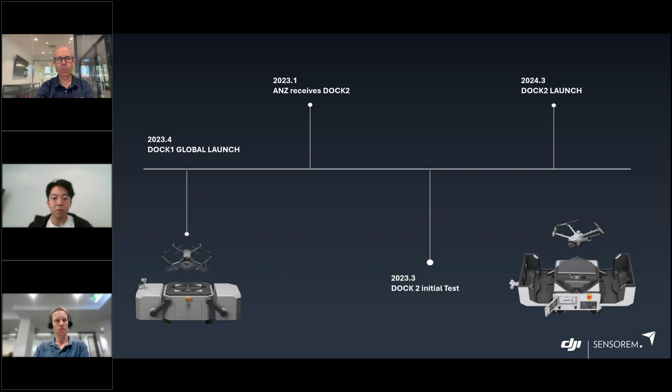Speaking of case scenarios, it achieves great success in security, patrol, search and rescue, first responder, and obviously asset inspection with the zoom camera. I have to admit there's a bit more limitation on the geospatial side. We understand that some end users are really looking forward to something that can also map rather than just focus on inspection, and also accurate flight inspections. That's why we released Dock 2 this year.

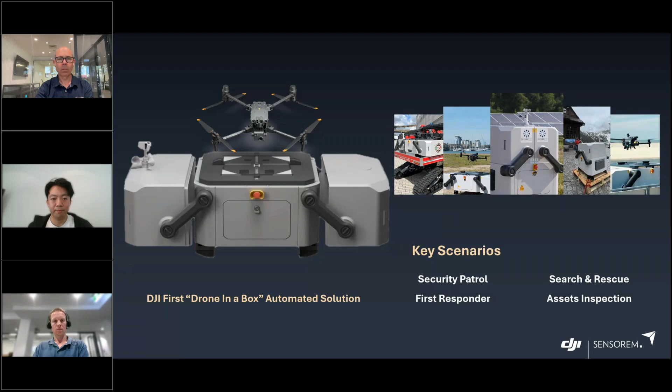So what's the difference between the dock units themselves? As you can see, the dimension is a really attractive improvement—it's just about half the footprint of the Dock 1. The weight is 34 kilograms compared to 105 kilograms, so now it's feasible for just one person to lift it up and deploy it anywhere you want. You can also mount it for a maximum operation range of up to 10 kilometers compared to 7 kilometers.

For the return-to-center system, we replaced the old pulling system with rods, now using a V shape in the middle of the landing port, where the aircraft lands and slides down into the correct position automatically. Besides that, we are now using a wireless charging system to improve efficiency as well as safety. So there are improvements not just in size but also in making it simpler, so it can perform in more harsh environments.

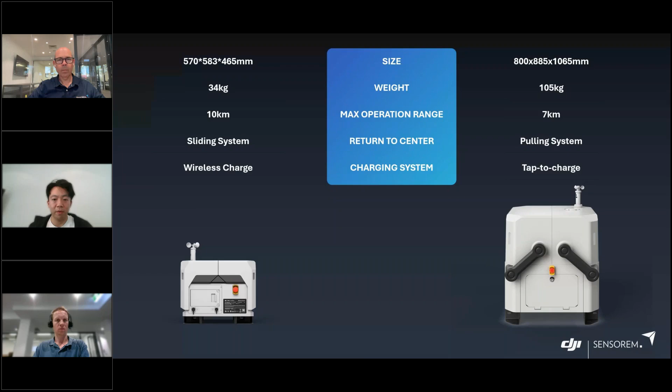The new drone models specifically for the Dock 2 are the Matrice 3D and the Matrice 3TD. The size is significantly smaller compared with the M30T. The weight is just 1410 grams, but flight time is up to 50 minutes. It does not have foldable arms like the Mavic 3 Enterprise series, and that rigidity helps a little with wind resistance, as well as with maximum flight time. We also have a higher IP rating compared to the Mavic 3 Enterprise series, which is IP54.

Speaking of the camera, with the standard Matrice 3D, we have a wide camera with a 4/3 inch CMOS 20 megapixel sensor, capturing at 0.7 seconds with a mechanical shutter as well. So if you are looking to implement really accurate mapping with an autonomous solution, this is right up your alley. The specs of the M3D camera are exactly identical to the camera of the M3E.

For the thermal one, the M3TD, it comes with a typical Mavic 3 thermal camera with a 48 megapixel smaller size sensor wide camera, and then having the digital zoom camera as well. Okay, let's move to the next one.

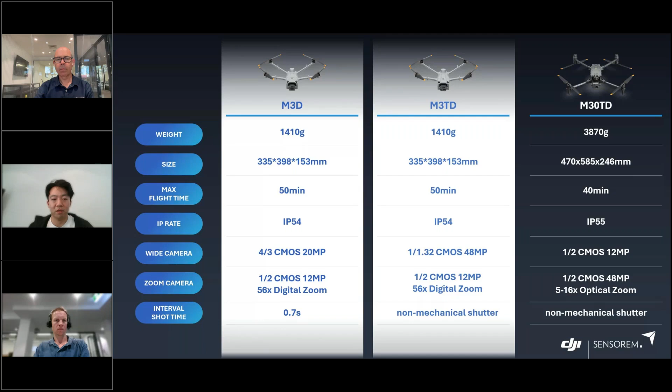So overall, how is Dock 2 different from Dock 1? First of all, it's lightweight. The size is smaller, not just easy to deploy, but also easy to ship.

The IP level, we have IP55 for the dock and IP54 for the drone, which means now the whole system is more robust even in difficult environments.

Efficiency: the flight time is upgraded to 50 minutes, being able to perform large mapping missions and also long period patrol. 45 seconds to take off, just one click and the drone can initiate the mission you require.

Accuracy: now we have the drone using timestamps to take images, with RTK as well as a large mechanical sensor. Everything you need to do the mapping is here.

Nowadays, deployment and maintenance will be rather easier. The core components are all modular, which means it's very easy to replace or fix. Okay, let's go to the next one.

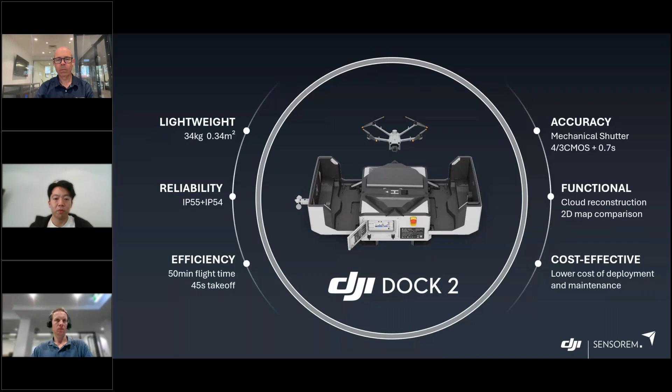For the use cases overview, when we talk about Dock 1 applications, most use cases mainly focus on public safety and inspection. But for Dock 2, we can go either mapping, public safety, or inspection, depending on the drone you're looking at. Today we're mainly focusing on the agricultural application, as we found there is a huge potential market in this vertical industry.

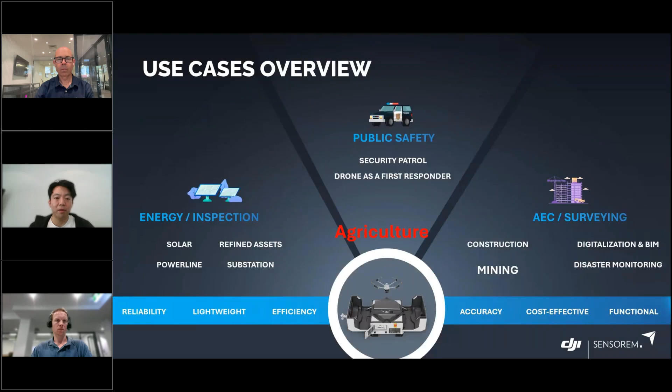Okay, let's go to the next one. Agriculture industry plays a very vital role in the Australian economy, with an annual export value of around 50 to 60 billion, making up about 10 to 15% of the country's total exports.

From precision agriculture to automated irrigation systems, technology has become an integral part of farming operations. Particularly, drone technology has been a game changer, allowing farmers to monitor crops, assess growth, and manage livestock with remarkable efficiency, significantly reducing costs and improving productivity.

As we continue to embrace this technological advancement, Australia not only strengthens its agriculture productivity, but also ensures its competitiveness in the global market. Next one.

You can see there are different categories here: the drone can be applied in different aspects like livestock, grain, and horticulture. Today, it's our honor to invite Sensorem to give you more insights regarding dock system application in the agriculture sector.

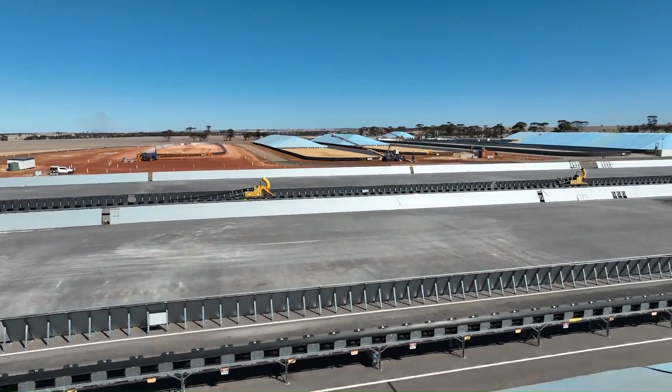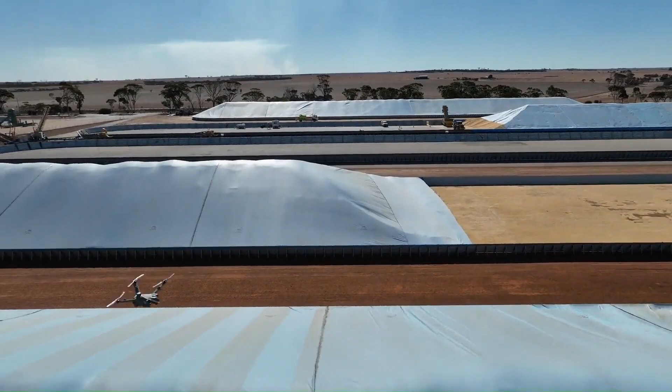I'll start with some info on Sensorem before we get into the topic for this webinar. Sensorem is headquartered in Perth, the capital city of Western Australia, with staff and operations across Australia including Sydney, Melbourne, Adelaide, and Brisbane. We offer cutting-edge drone and remote sensing technology across multiple sectors, not just agriculture. We're also involved in utilities, critical infrastructure, and mining.

We're one of the largest drone-as-a-service providers in Australia, and we're definitely leading the charge with drone-in-a-box technology. Sensorem's all-in-one drone-in-a-box solution, which we'll be talking about today, is called SenseHub. It's compact, modular, and a very powerful solution, designed for flexibility, efficiency, and performance in any environment, which is really important in a country like Australia.

We've got large extremes in environmental conditions. It's a modular design, very compact in its footprint. SenseHub is perfect for locations where space is limited but performance is essential. Whether deployed in remote, industrial, or urban settings, SenseHub is engineered to deliver seamless drone operations without the need for large infrastructure.

At the core of SenseHub is the DJI Dock 2, the state-of-the-art drone system we just saw Lumen describe, which serves as the command center for SenseHub. However, it's also the advanced communications module that sets SenseHub apart. This communications module, paired with the DJI Dock 2, is packed with cutting-edge features to ensure you have robust and reliable remote operations.

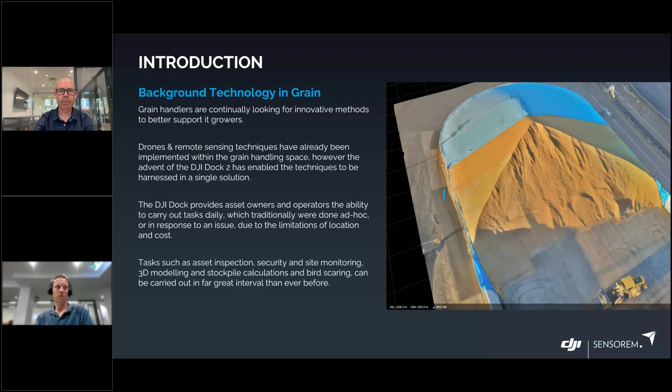So just a bit of an overview of the sites. Let's go to the next slide. So this, I'll just hand across to you, Coops, and you can have a bit of a chat. Yeah, not a problem. Thanks, Ed.

So we just wanted to touch or express the operational footprint that Drone in a Box solutions provide clients. So asset owners such as grain handlers that are typically in more remote regional locations and other industrial operators, the Drone in a Box solution is able to touch on these far more easily and efficiently. You've got sites that are spread hundreds of kilometers apart. These can all be kind of reached and operated from a single location, such as a remote operations center that may be in a metro location for us here in Subiaco.

This enables an increase in operational tasks because you can reach these regional locations more readily without actually having to mobilize out there. So there's an efficiency that can be gained through doing tasks and a safety aspect that's also gained by not having to travel out there. I'll touch on the next slide, but that safety is also a benefit for both the asset owners and the operators and also the service providers such as Sensorem and its team.

The true advantage is when you actually see these systems in action. You will complete an operational task or a flight at, say, a location such as Wubin, and then within a couple of minutes you're taking off at a location hundreds of kilometers down the road, down at Dowerin, for example, carrying another job, and it was mere minutes away. So the operational footprint is very vast and is only limited by your connection through internet and power, all back to a remote operations center. So it gives you far more reach than ever before.

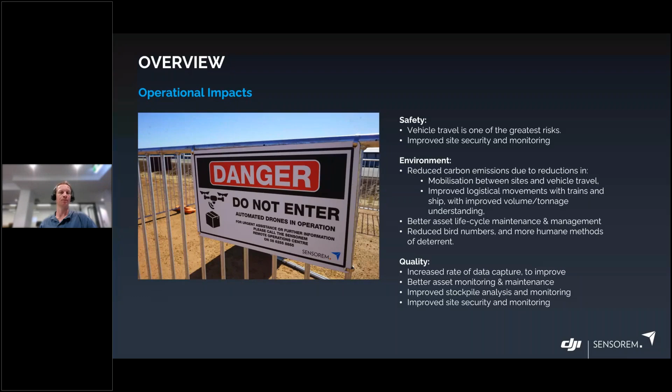Thanks. Yeah, it's amazing just how many times over the years we've seen our remote pilots drive 3 or 4 hours to do a half an hour job, and then 3 or 4 hours driving home. So a whole day traveling in a 4-wheel drive into the middle of nowhere just for a half an hour job. It's amazing how much time we've been able to save.

So SensHub, this is our communications module. It's packed with cutting edge features to ensure robust and reliable remote drone operations. And that's the key about this—the equipment, the Dock 2 and the communications module, has to be robust and also reliable in a whole pile of types of conditions.

For the DJI Dock 2, it provides improved capabilities compared to the Dock 1, although the Dock 1 was incredible when it first came out. We still have those deployed on site, and they've maintained incredible reliability across a whole range of different weather systems that have come through. So the most important part is just the communication.

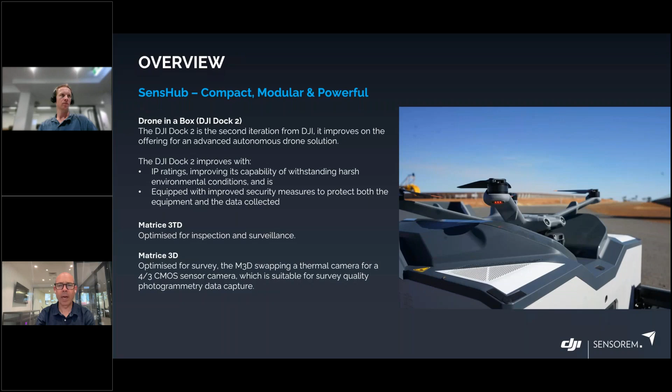Having best-in-class satellite connectivity for uninterrupted communications, even in very remote areas. VHF over the internet capabilities, providing seamless long-range communication. In Australia, with the regulator, it's important that we have VHF comms with manned aircraft. AI-powered CCTV ensures advanced tracking, floodlighting, and enhanced security awareness around our sites.

Edge computing for real-time on-site data processing, so we're not sending stuff back up into the cloud and waiting for that to be downloaded—processing happens on-site. Then real-time monitoring and uninterrupted power supply, a UPS for continuous operations, reducing downtime and ensuring system reliability.

Our system—if we're sitting here, this image shows the Dock 2, and behind is actually the Dock 1 setup with our comms, all plugged in there, ready to go. You can see the Starlink antenna. Our new SensHub system is designed as a plug-and-play functionality, which is really important for a lot of clients. That means, as mentioned with the Dock 2, we can now streamline the deployment process, minimize setup time. The ease of redeployment also makes it an ideal choice for projects requiring flexibility.

So it allows quick relocation of the system as operational needs evolve. On an industrial site, often there's changes to buildings, they might be adjusting the roadway, or building new infrastructure, and that might require the movement of something like a drone in a box system. So it's got to be able to be moved fairly easily. This efficiency, combined with the system's high level of automation, offers scalable solutions for a wide range of industries, from agriculture, through to mining, infrastructure, and public safety.

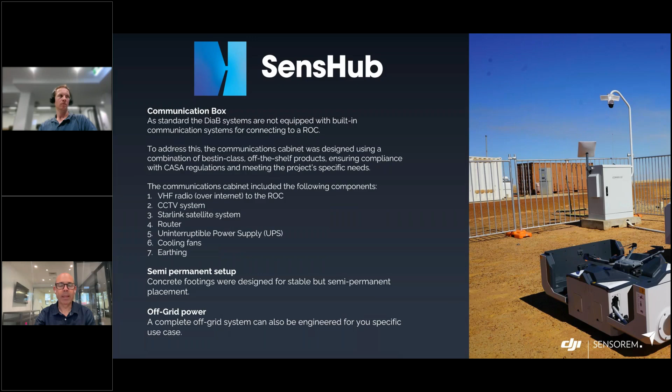Probably one of the most important parts about the system is the flight software. So we can go to that slide. The Drone in a Box project requires, for our projects, 24/7 operations. Most of these operations are pre-programmed missions managed through the Flight Hub 2 or FlytBase software.

Although most missions can be managed by automated flight paths, our remote pilots do sometimes take advantage of the manual control options in the flight software, together with specifically developed methodologies that ensure they can achieve the mission. Because although some missions are fully automated to start with, there are times when you need a remote pilot to be involved hands-on with the controls and maneuver the drone—whether that's moving birds away from stockpiles, or maneuvering into position to get that perfect image during a plant building condition assessment.

Manual control is also really important to manage flight paths around people on site as well, as these industrial sites have a lot of people moving around. It's really important for us that this new technology didn't interrupt the normal site activities.

During peak times at these industrial sites, we have arriving trains, conveyor belts operating, trucks, front-end loaders, and other maintenance crews, particularly during peak seasons through the middle of the day. At night time, things start to slow down a bit, but most of the drone activity is happening during the day, when our remote pilots cover a large range of missions, including bird scaring, site monitoring, asset inspection, and then obviously during the night, site security. So there's a lot of activity and use cases going on.

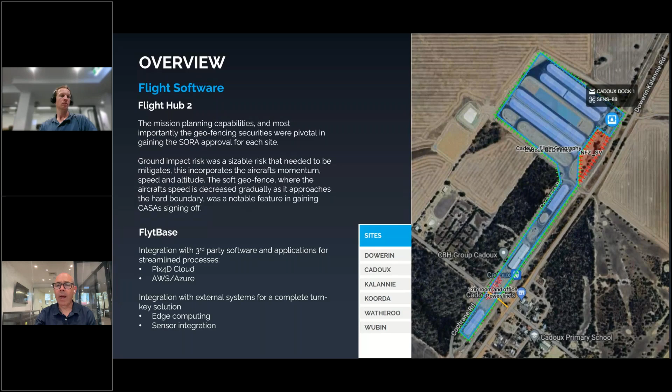Site security for drone technology, even for agriculture, is becoming more of a focus—not just for industrial sites, but also across a range of different industries: power networks, water authorities, etc. So the Dock2, paired with unique flight management software like FlytBase, allows for repeatable, precise flight planning, but also with that option to manually intervene when required. And we're going to be seeing some videos in a minute on how this all works.

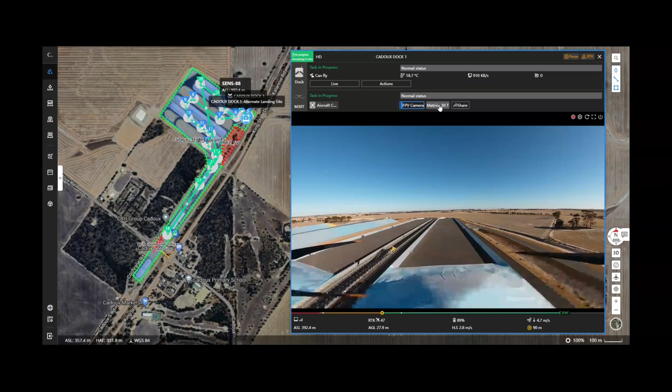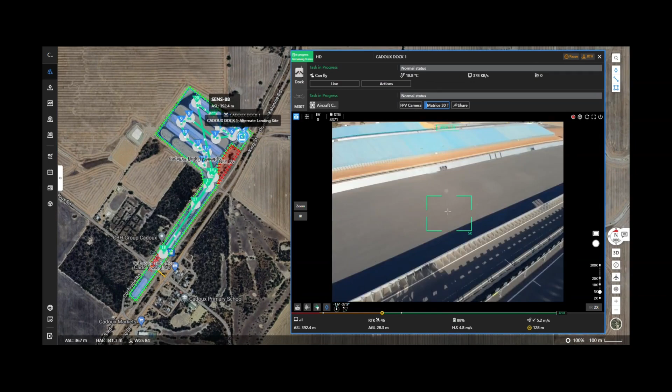So there are things on site that need to be continuously monitored. Most of these relate to any drone in a box projects. Some are particularly unique to the projects that we're operating.

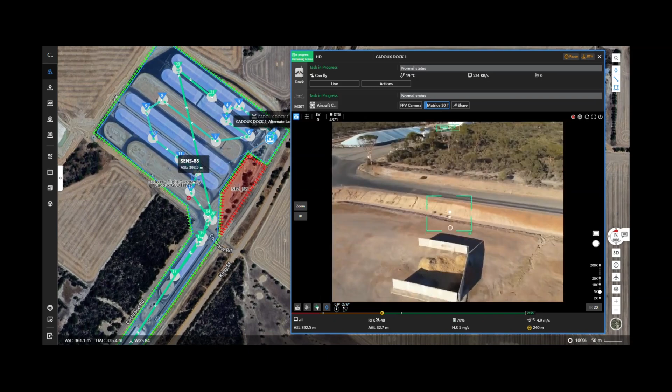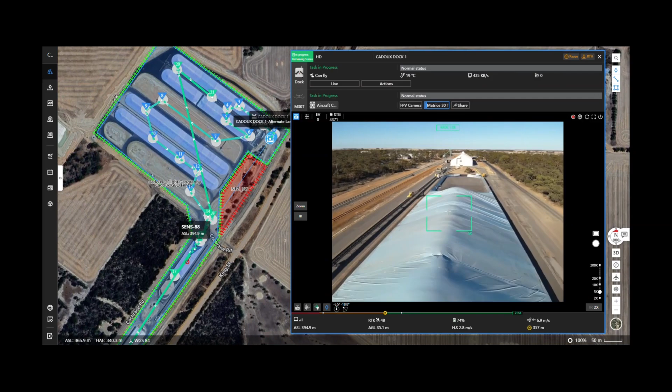Manned aircraft. One of the main considerations is how we managed manned aircraft. Chance of manned aircraft around these sites was pretty low—they're located normally about 100 or so miles from any regional airport. But we were required to submit a NOTAM through the approval process. For us, that ended up being incredibly useful. We actually had military low-level fast jet aircraft doing training exercises right across these sites, operating at almost exactly the same altitude above the ground as we were.

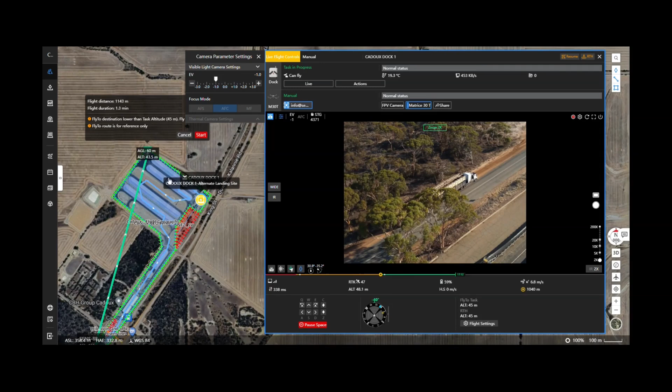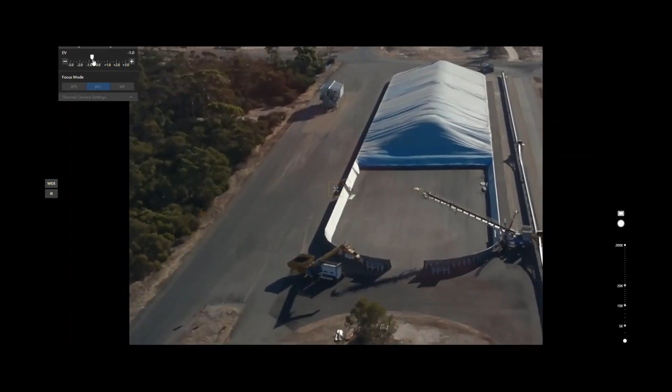So our remote pilots from our remote operations center were able to maintain VHF contact with approaching aircraft through the Sensorem system. Through the communications box, we're able to cancel any planned drone missions until they cleared the area. So it really did validate some of that on-site comms setup and also the remote operations flight procedures.

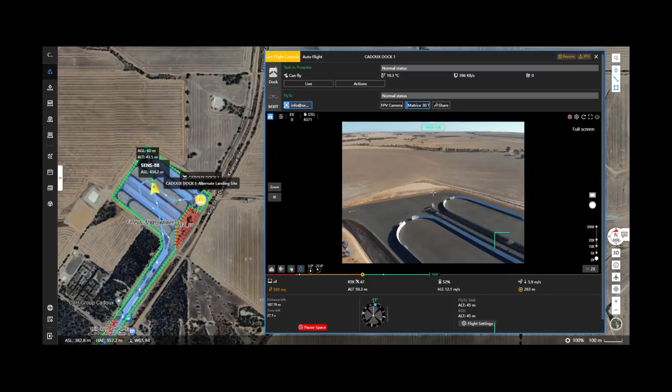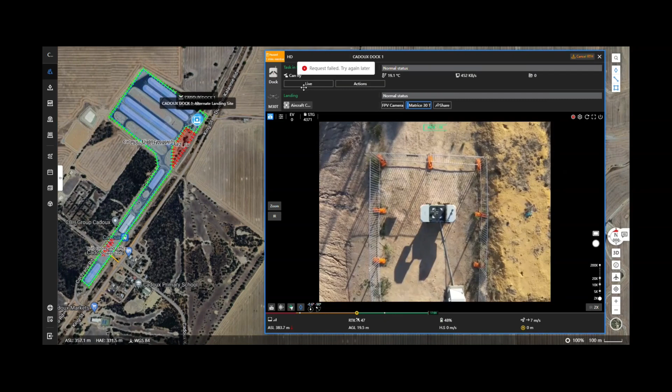Weather obviously poses a threat to any drone operation. However, normally a remote pilot on site, if they're physically there controlling the drone through a controller, can easily assess the current and approaching weather—they can feel the wind picking up, feel the temperature increasing, etc. So that, in our minds, was going to pose a bit of a challenge, being at a remote operations center hundreds, if not thousands of kilometers away from where the drone was operating.

So when we're operating from a remote operations center, the pilot's relying on other tools to assess the weather. The DJI Dock has excellent weather monitoring, surprisingly accurate. And when you combine that with online apps like Windy Weather, and also the predicted wind strength at different levels within the actual flight management software, the remote pilot is always able to get a very clear picture of the overall weather conditions. In fact, it may even be better than being on site.

Over the first 6 months of operating the first 6 DJI Dock units, we experienced a range of weather conditions, from temperatures of 45 degrees Celsius, about 115 degrees Fahrenheit, to major squall lines of thunderstorms and heavy rain passing through. The Sensorem system, both the docks and our comms boxes, managed incredibly well with absolutely no issues.

Situational awareness is obviously really important when you start operating this technology. Feedback from our remote pilots is that situational awareness around normal site activities actually ended up being easier from a ROC compared to operating the drone from site, because in a ROC you've got large screens. It's quiet, it's comfortable. You can easily turn up the air conditioner and make it more comfortable.

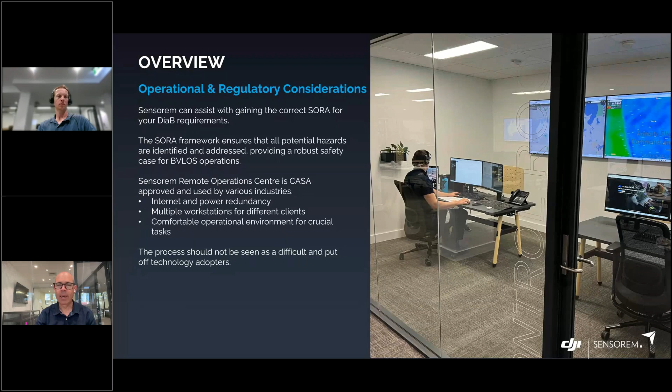Site security - it's not necessarily something you would imagine you would need on an industrial site in the middle of nowhere. The population around these industrial sites is relatively low. We're going to bring up a video now that'll show a real deployment of a drone with a thermal camera.

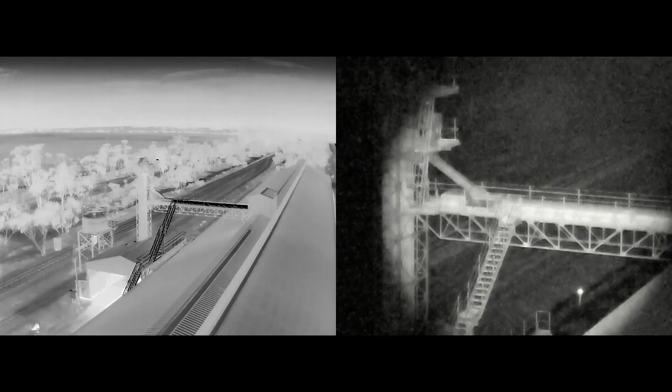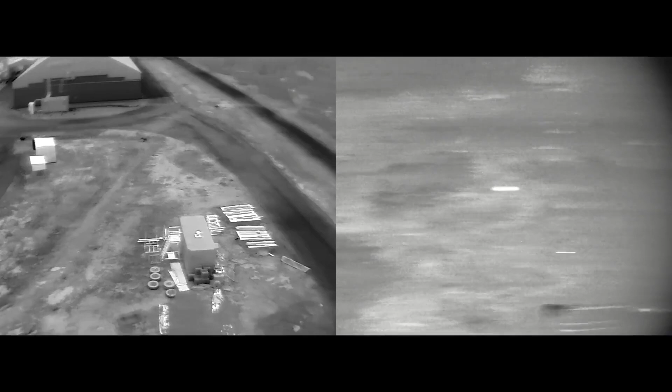This is operating around one of these grain receival sites at night time. On the left-hand side of the screen, we've got the infrared camera operating, and on the right side, we're using the zoom camera paired with a top-mounted spotlight lighting system - incredibly effective operating around these sites. These sites, at night time, are generally unmanned and have a huge amount of infrastructure, so to detect intruders targeting some of these sites, we can use this technology, and you can see how clear it is on the right-hand side.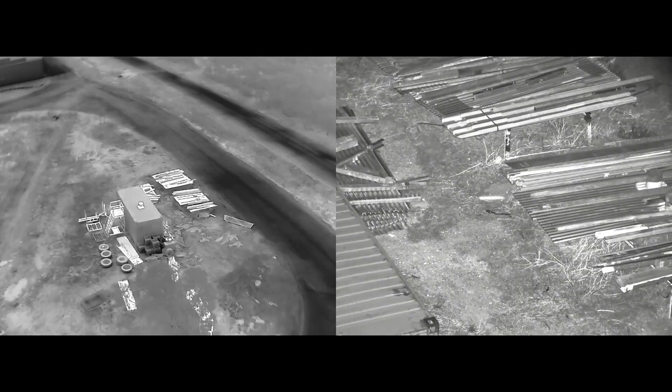Now we've just started to work with companies like FlytBase with their software, integrating AI-powered additional software that's allowing us to automatically do flights and then detect intruders, vehicles, and people.

So we'll move on to the next use case.

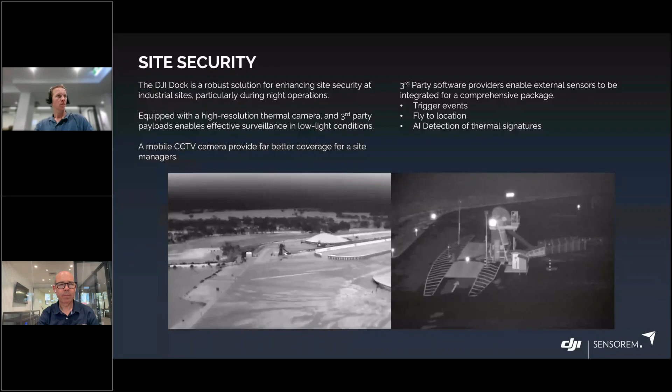So site monitoring - as I mentioned before, we have about 300 grain receival sites around Australia. If you add in all the other agricultural and industrial sites, we're talking in the hundreds. We've got a number of people managing multiple sites at the same time, so there'll be a general site manager operating or managing, say, 5 or 6 of these sites. And to drive to each of those is a round trip of about 1,000 or 1,200 kilometres.

So having the ability to see what's going on at these large, complex sites within a few moments, to call up a drone service provider like Sensorem and say, I need to go and see what's going on with the loading of a train at this particular site, using that as an example - that person doesn't have to get up early in the morning and drive hundreds of kilometres just to go and see something for a few minutes.

Then we can land the drone, jump to another site, and they can do exactly the same thing. So effectively, what would normally have taken 8 or 9 hours of driving around visiting sites is now taking maybe 20 or 30 minutes out of their day.

So it really provides valuable oversight, confirming that site activities are progressing as expected. And if someone reports a site activity that's not in compliance or needs advice from a manager or supervisor, it allows them to jump in and go to a targeted area. Also verifying that maintenance tasks have been done correctly and completed. This capability helps with operational integrity and also helps prove safety, giving them an opportunity to validate that safety protocols are being complied with.

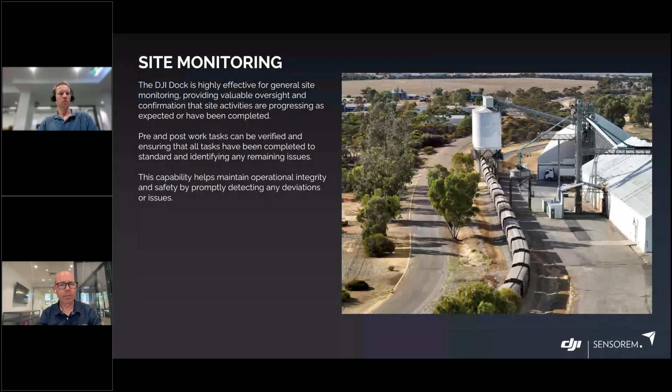Go to the next slide. So volume assessments - something we'd typically see in the mining industry, like stockpile calculations. The DJI Dock2 has been an invaluable tool for collecting this data, which can be repeated, and it's definitely an automated process. These industrial sites contain significant tonnage of grain, so being able to keep up with accurate tonnage calculations has been really important for our clients. It truly is an automated process, being able to send the drone out to collect this type of data.

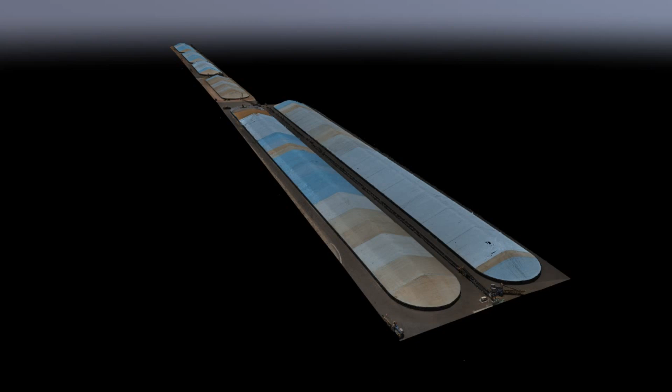Once the drone's landed, it's automatically uploading the data via Starlink. We use the Starlink satellite system into the cloud, and we can then process that within the cloud, or download it into our office, where our survey team can use other third-party software like Pix4D to complete the volume calculations.

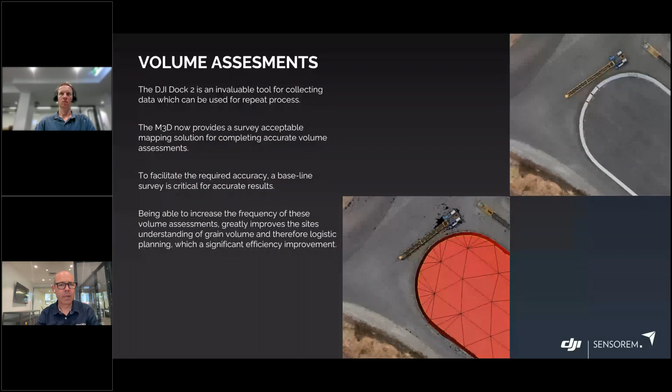This is all happening while there's activity on site as well. So the volume calculations and data collected using a very small drone, like the DJI Dock2, really don't have any impact on what's going on, on site during busy times.

Coops, did you want to run through some of the site modelling now? Sure. So in conjunction with your volume assessments, specifically the Dock2 with the M3D now, 3D modeling and site digitization becomes far more accurate and easy to do.

This provides two benefits for the two different parties. The asset owners and operators have better, up-to-date site conditions, giving them 3D context to what is actually going on if they need to share information with other stakeholders or representatives within their company - say they're trying to explain something that may have occurred and someone hasn't been to this remote location. Touching on the vastness of these remote locations, it's sometimes hard to get a whole group of key people together and travel hours into a location, whereas these 3D models or digital representations allow people to express, share, and articulate what's going on with a bit more context.

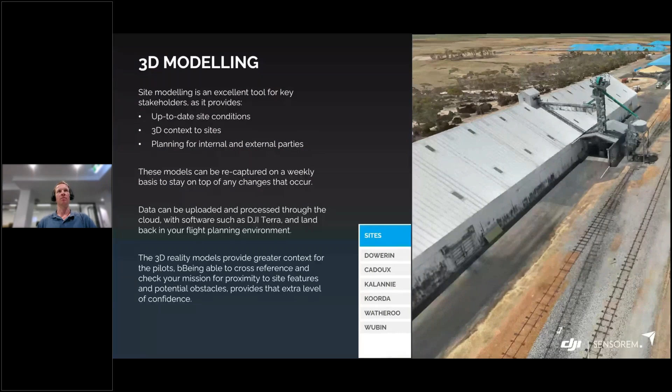Then load that back into your flight planning software or onto your client. The advantage in the flight planning software is it provides great context to the BVLOS pilots. If they carry out an operational task or mission and something has changed on site, the 3D model will capture that, providing more situational awareness for any impacts or risks that may be associated. So it's a very good planning and risk mitigation tool with this 3D modeling.

Touch on now the bird scaring, and I've got a little video to share as well.

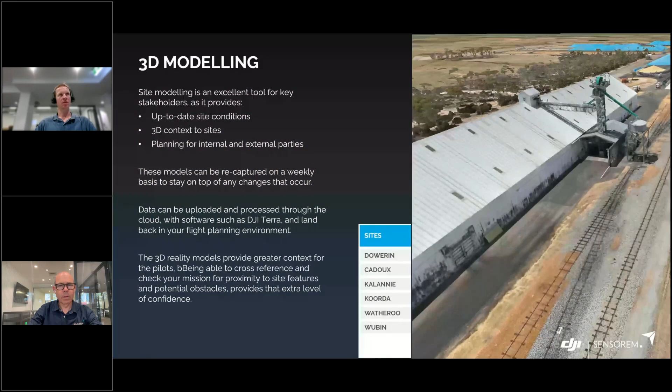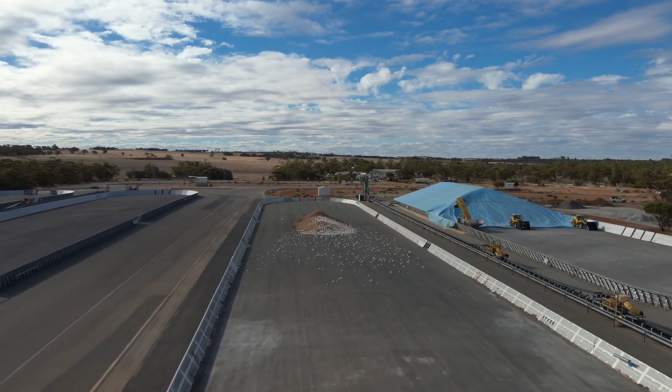Bird scaring is one of the original use cases and why we originally got involved with projects in agriculture. As mentioned before, birds are a major issue across the whole agricultural sector, but we're going to see an example here with the amount of birds, in this case corellas, that gather around these grain receival sites.

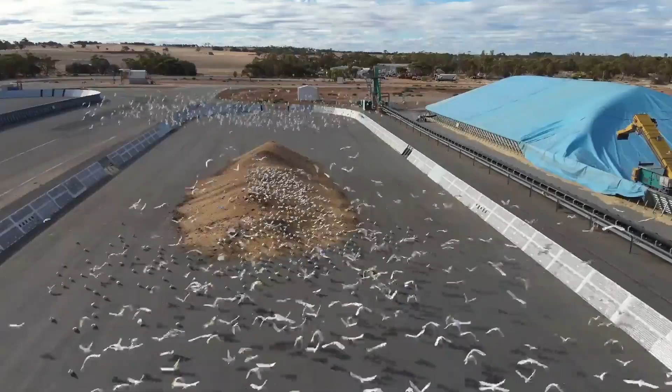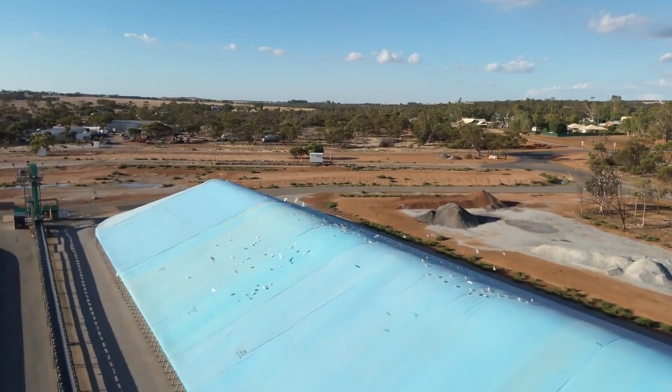You can see where they're basically trying to target an open area of grain, and then the tarps sitting next door. We're talking thousands of birds every day sitting on top of the tarps. So being able to integrate third-party speaker and spotlight systems on top of the docks, on top of the drones that we had with our systems, has been absolutely crucial.

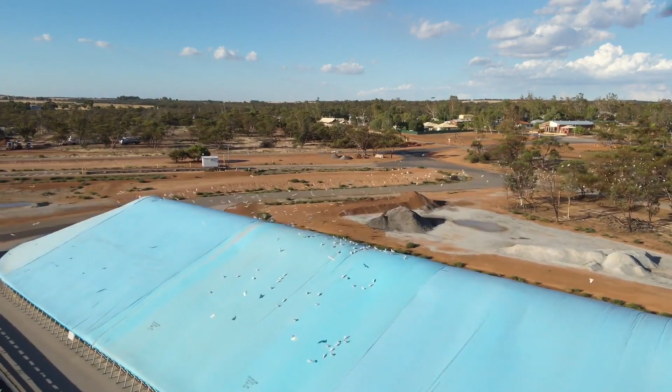Really good for just scaring the birds away. Traditionally they would tend to be a little bit scared of the drone itself, just the noise from the drone. But as the drones get smaller and quieter, implementing these speaker systems has been really crucial.

We can obviously use the speaker systems for other use cases, like alerting people of some issues. If there's been a problem on site, we can use the speaker systems to talk to people. We can use the spotlight systems for other use cases like night security, which we saw before.

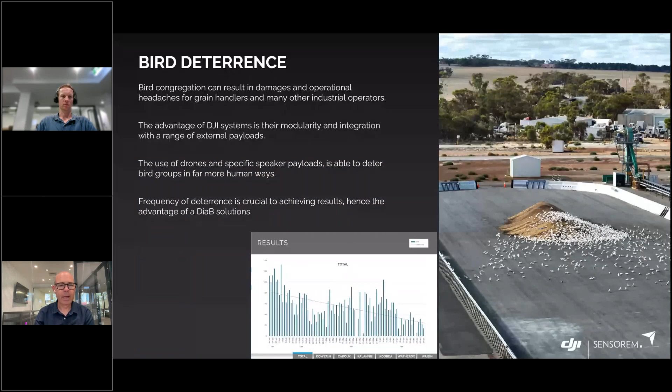This graph gives you an idea of when we count birds, showing how there's been a reduction in the birds over time. So that's been a really successful use case.

Cooper, I'll let you talk about the asset inspection, given that you're an engineer by trade.

As we know, one of the big advantages with all drones, and specifically the DJI drones that do this very, very well, is asset inspection. They're used far and wide for this with their great cameras and gimbals and other additions to payloads such as thermal.

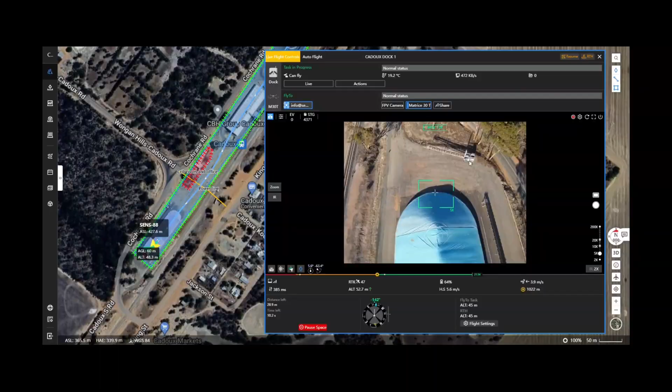With the DJI dock now, you're just able to do this more frequently. That provides clients with more information at a higher frequency to make better judgments. They can start to do a bit more trend analysis.

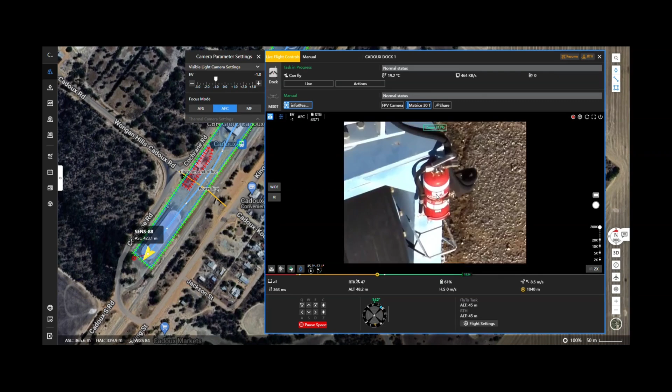In this video, it provides site managers who probably weren't ones to say, hey, I'm an engineer or asset maintenance person, but I need to know something going on with my site. It could be something as simple as, has that asset or that tool got the right signage? Has it got a fire extinguisher attached to it? Has it got whatever it may be?

And the drone in a box solution now allows them to quite easily task a flight to go and check on something.

Coupled with that, where we saw in these remote locations the impacts of storm damage, you're able to routinely and quickly go verify whether a site is ready to come back online. Often they may lose power and go into a dormant or weather dormant situation.

You task the drone to do a quick site check, verify that most things are okay, and then they may carry out a specific asset or maintenance check on certain areas with known potential issues, like sheet cladding, gantries, walkways. That can all be fed back, and the teams can then mobilize back out to site and get back into operation.

Features such as the AI spot check and thermography of the drones are all available within the Dock 1 and Dock 2 systems, which is excellent. So basically all of our normal tasks are just bundled back into the dock, making it a very usable and diverse tool now.